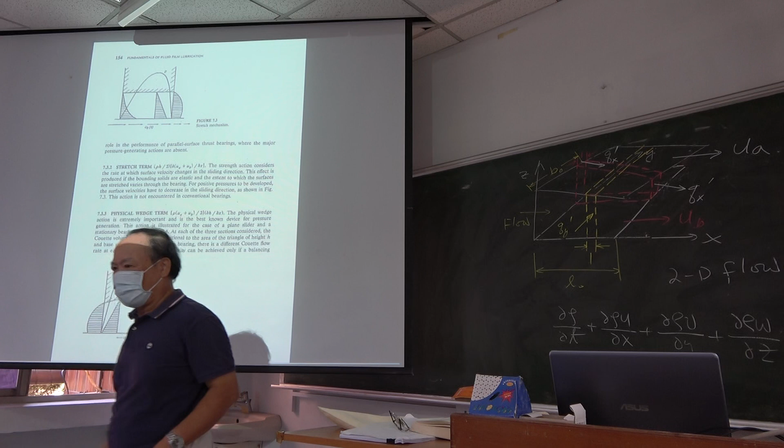This is the stretch term. For this term, UA and UB - if your profile looks like this one, you have your low surface. Originally it's UB, but it becomes the variable.

You find that your velocity from this side gradually becomes smaller. That's because originally you have a fixed value, but with elastic deformation, you allow your velocity - your flow velocity at the bottom surface or low surface - to be changeable, from high to low or low to high. If UB changes this way, and we assume the upper surface has zero velocity...

If the lower surface's velocity changes from high value to low value due to deformation, and if it's like this way, you can create a positive pressure. Your pressure profile looks like this one. Then your positive pressure is created if your UB changes from high value to low value.

So in this case, look at this term: UA equal to 0, UB changing with x - is it negative or positive? Is it a positive value or negative value? From large to small, is partial UB over partial x negative or positive? Give me the answer - positive or negative? This is large, this is small, so what about this? Partial UB, partial x - positive or negative value? If you cannot identify whether this value is positive or negative, I would say you don't understand the math - it's not a pass.

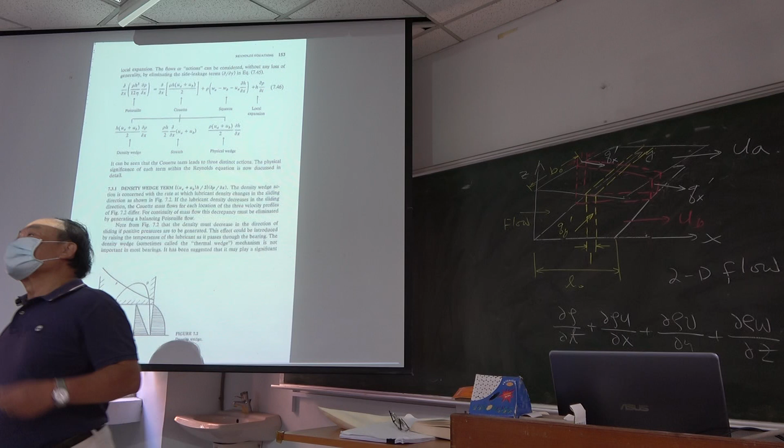Please keep in mind that you need some area that creates higher positive pressure. That is because you need lubrication - not just putting oil. Oil is not the key issue, not a key factor. The key factor is that in the flow field, you can create the positive pressure as large as possible.

This idea is very, very important because when you work outside, most people think that by putting oil, you can obtain high efficient lubrication. I would say no, because you don't create the high pressure, high positive pressure. So this term should be negative, and then this term should be negative, right?

This we call the stretch mechanism. This case occurs when you have a high pressure and allow some area to have elastic deformation. So here, this term we call the physical wedge term, which is just two surfaces - when they're not in parallel, there's an inclination angle, about 4 to 5 degrees at most. So there's a lot of people who make this wrong.

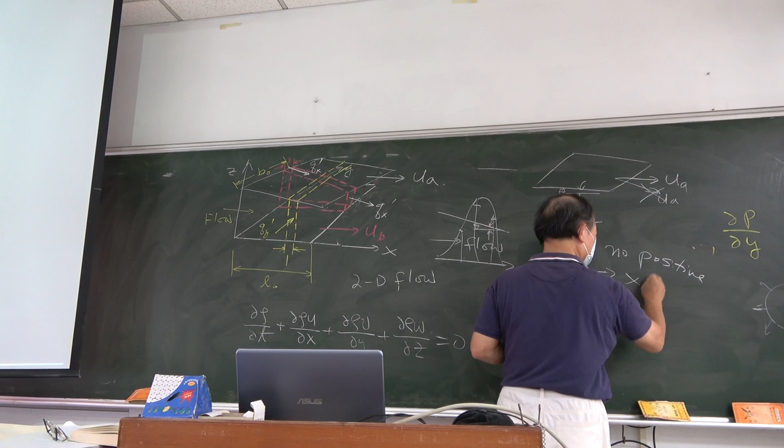You put the inclination of the flow in this direction. This is it. Then we create the pressure, positive pressure. If we put it this way...

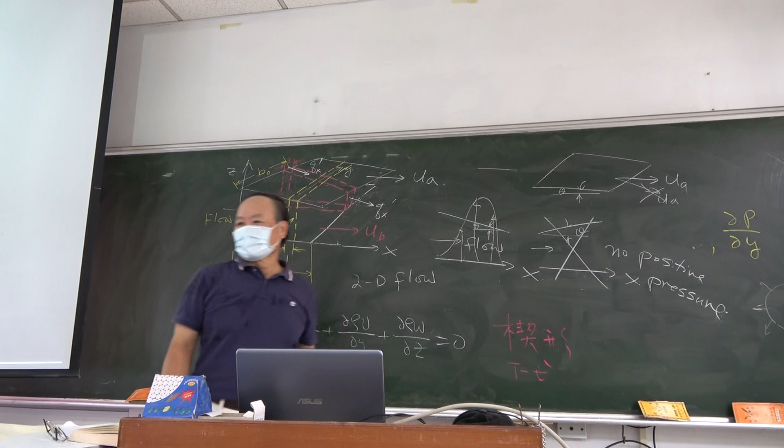Going from large to small creates a squeezing effect, right? There is a wedge. The wedge allows the flow to be squeezed, right? If squeezed, they have a high pressure created in the flow field. If it expands from small length to large length, then you don't have the high pressure created in the flow field, right?

So you have a design that looks like this one. This we call the wedge effect.

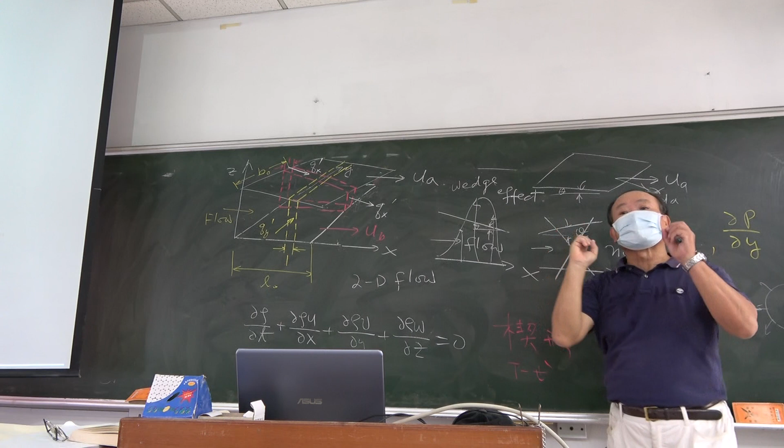How do we do it? Allow the lubrication to create high pressure. That's why we have water between the teeth - this water allows us to separate the two teeth, creating very small friction to avoid wear on your teeth.

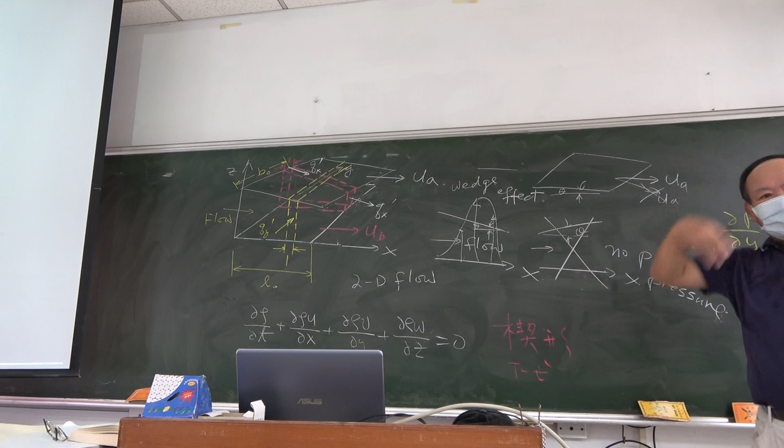That's why we have tears - because we have water between two moving surfaces, to protect your eye. We call this the lubricant. In machines, in every engine, there are many different kinds of lubrication we need to design.

So here, physical setup from here to here. We have two kinds like this one. Apply it again on the board. This UA equals 0, and UB is moving this way. Here we have an X defined in this direction, or Y in this direction.

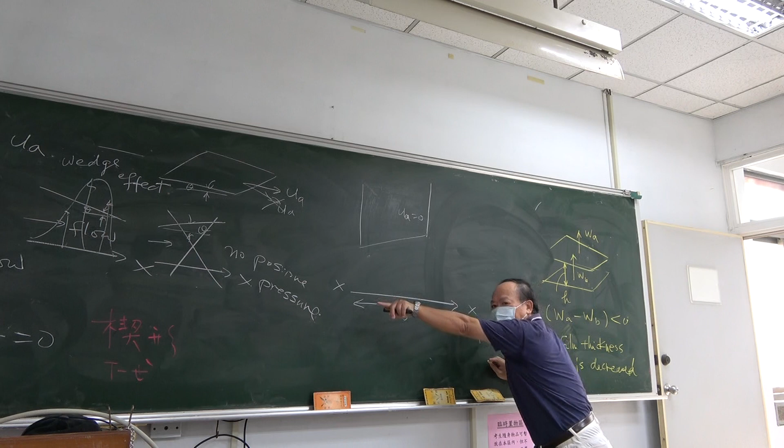In this direction, or in X direction. If we define in this direction, our UB plus UA, in X direction, this one - if you define your X as the right wall, then UB plus UA, with UA equal to 0, this value is on this side, so it is negative. And how about this one?

If you define this way, and your configuration is like this way, then H changes with X direction if defined in this way. What is the value? Larger than 0 or smaller than 0?

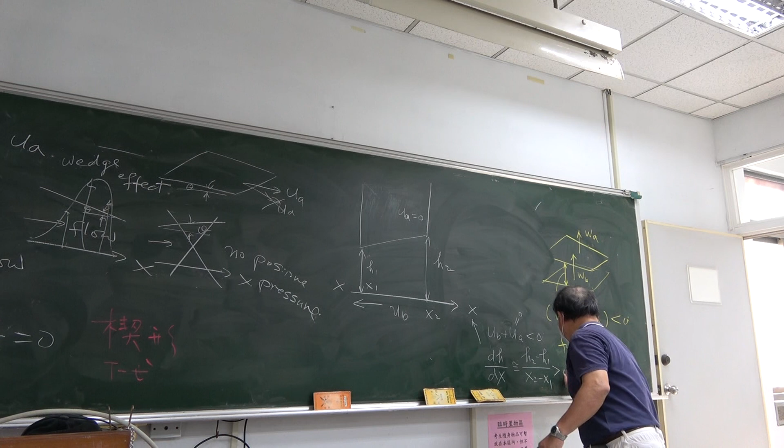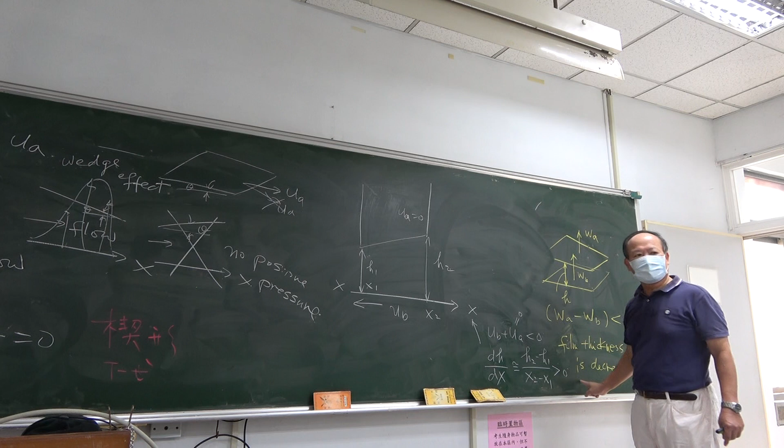UA plus UB smaller than 0, and DH/DX is larger than 0. It looks like this case. You define your X in this way, on the right wall. So please tell me, UA UB times partial H, partial X.

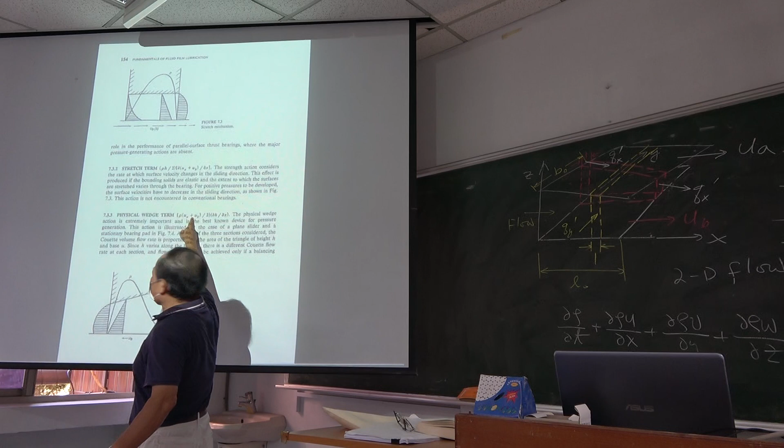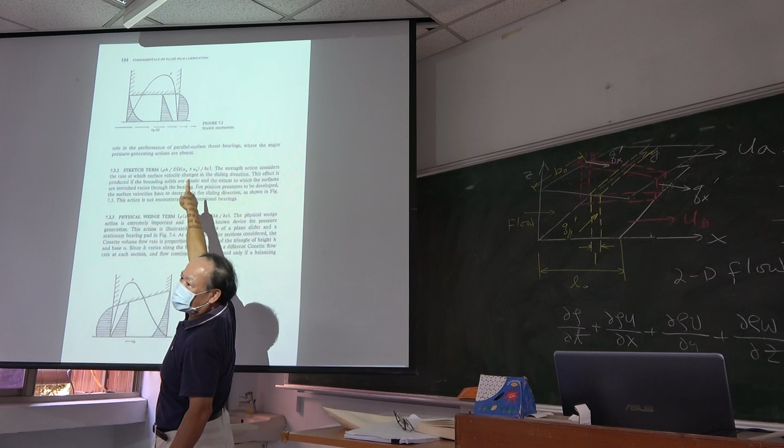So velocity - this term, UA plus UB, is a negative value, and partial h partial x is positive. So negative times positive, this term is a negative value. If it is negative, like the last one, we can create a positive pressure.

Now, if you change your x to be in this direction, to the left side instead of the right side, you allow x to be the positive direction this way. In here, UA plus UB is positive because your x is defined in this direction - UA, UB is in the same direction as this x.

But here, from here to here, partial h partial x should be negative, right? From here to here goes from large to small. So partial h partial x is less than 0.

So this term together should be negative, the same as this one. So whether you define your x in this direction or in this direction, you have allowed this term to be negative. In this case, you can create your positive pressure like this one.

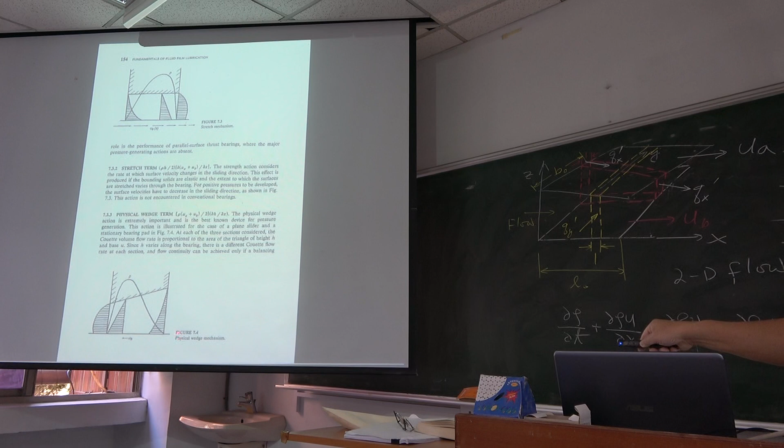Which one? Is this case or this case? In this one, x is this one. So please mark x here, not this here. It's marked here, alright? And then you have this term value to be negative.

In this case, you can create a positive pressure. I repeat again. Try to have your sum area, lubrication area, to have a positive pressure, and then this value should be as large as possible.

That's the only way you have a high efficiency design - good lubrication. Okay, not just put the oil. Put the oil is not the key issue. You try to keep your fluid with the positive pressure, this positive pressure as high as possible.

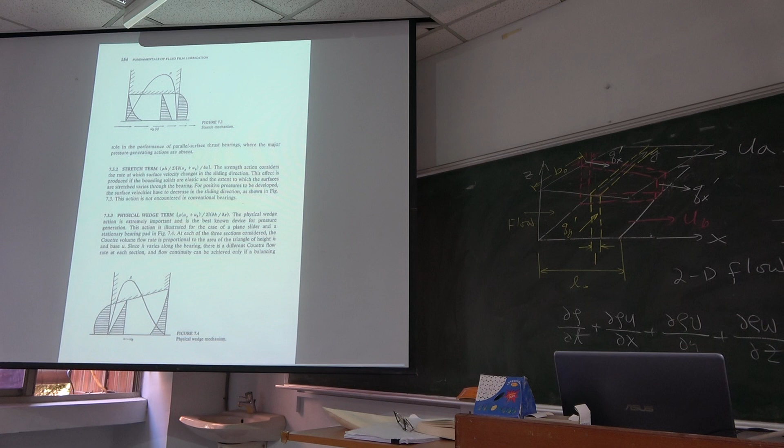So this X should be here, so it's associated with this case. This we call the wedge. You find that the flow goes from the right hand side to the left hand side, right? You find that the space becomes smaller and smaller.

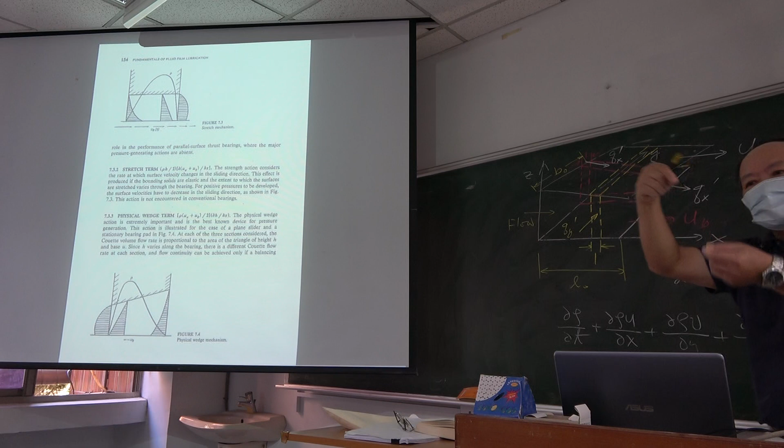This quantity becomes smaller and smaller. This space changes to be the negative value. The film thickness becomes smaller and smaller. The space becomes smaller and smaller. In this case, we call it the wedge effect.

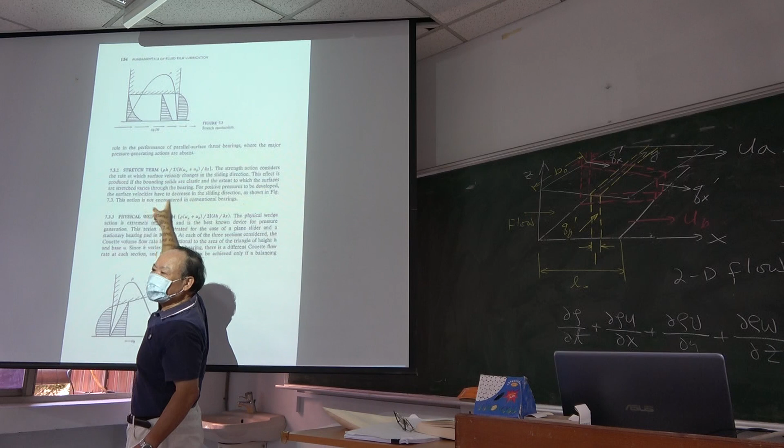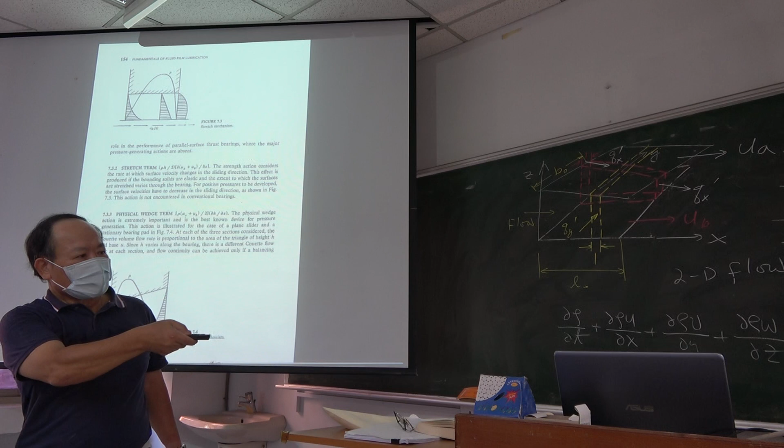It's very important that you try to have your mold and then your workpiece or your bearing to have wedge effect. If you have wedge effect, then you can create the positive pressure. You need to let this wedge pressure satisfy this case, not satisfy this other case. This term should be negative.

If two surfaces have the lubricant between them, right, if the thickness is increased, if you increase your thickness, you'll find that the space becomes large. Can you create the film thickness? No way. Okay, please return to the Reynolds equation.

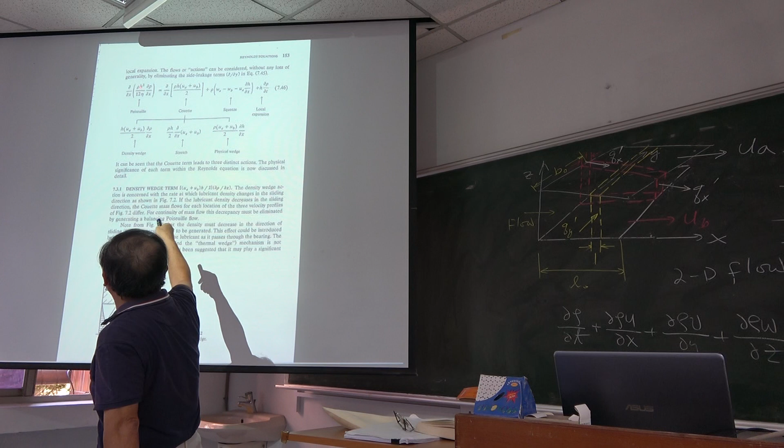In the Reynolds equation, if P is large, how is H? If you keep this term to be a finite value, you increase your P. How to increase your P? You have to reduce your H. Reduce your H to create a large pressure. If you increase your film thickness, then your pressure will be low.

Keep write down, okay? Write down - very important. Not just give the large space and allow the lubricant to enter. No way, it's impossible to create the positive pressure that way. The lubrication allows your film thickness - increase your thickness, pressure becomes low.

Your film thickness is low, then your pressure becomes high. Okay, so they are opposite. They combine together - should be the moderate value.

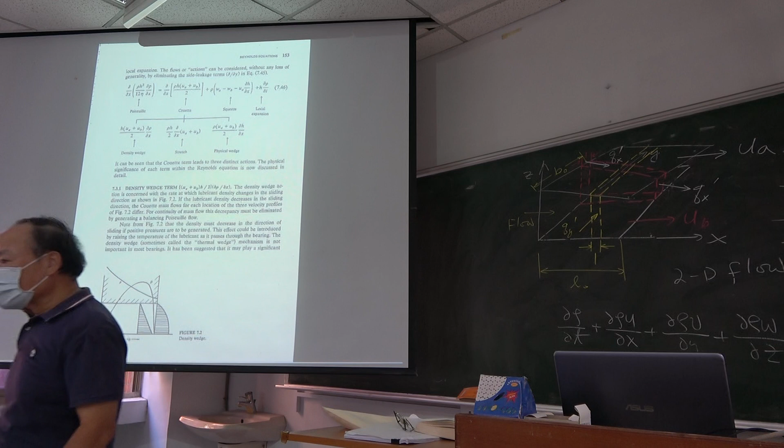Because if the film thickness is too large, then your pressure is low down to be the zero pressure. That's very, very important, understand? So lubrication is not an easy thing.

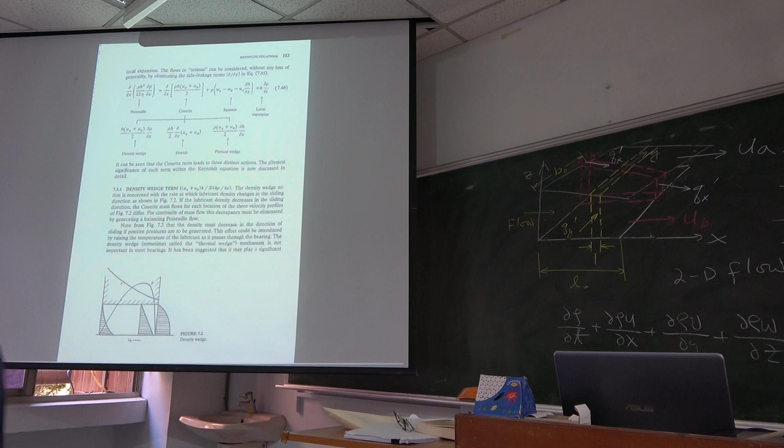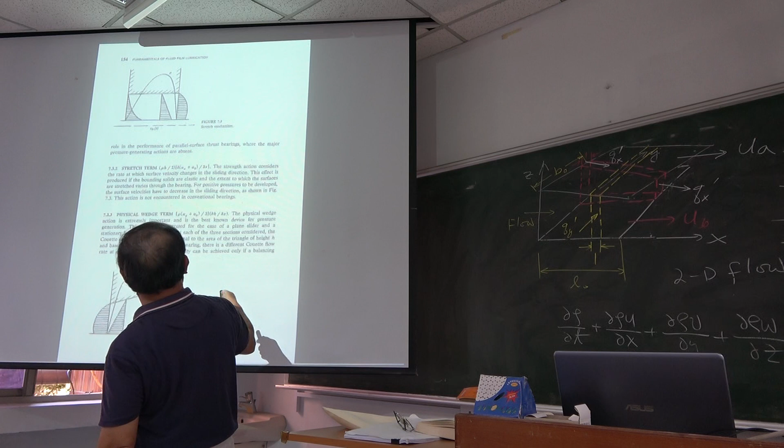Okay, so this is the physical sense we've discussed. Okay, next. Here, normal squeeze - so how do we allow the squeeze term to create the positive pressure?

Allow the upper plate to move with velocity, we call it WA, in the normal direction, upward, right? The lower plate also moves upward. We assume maybe they are separate, maybe this is not always upward, maybe downward. But finally this WA minus WB, this value should not be equal - right, WA minus WB should be less than 0.

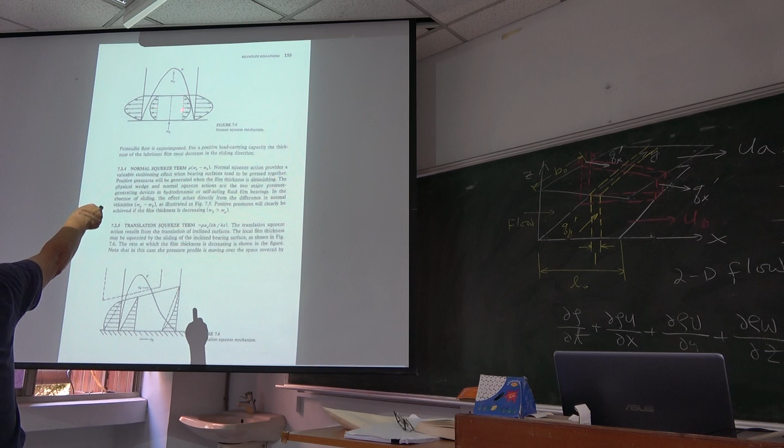They move close to each other, allowing the film thickness to decrease - you have to allow it to decrease. If it decreases, then the flow originally inside the film has to be squeezed out to the two sides.

So the velocity will look like this one. On the right hand side, the velocity looks like this profile. On the left hand side it will be this way. Because these two surfaces are close to each other, we call this the squeeze effect.

So this term will be negative all the time? Yeah. But I don't see what... it's just that WA is just this speed, upward speed. But it's just this part.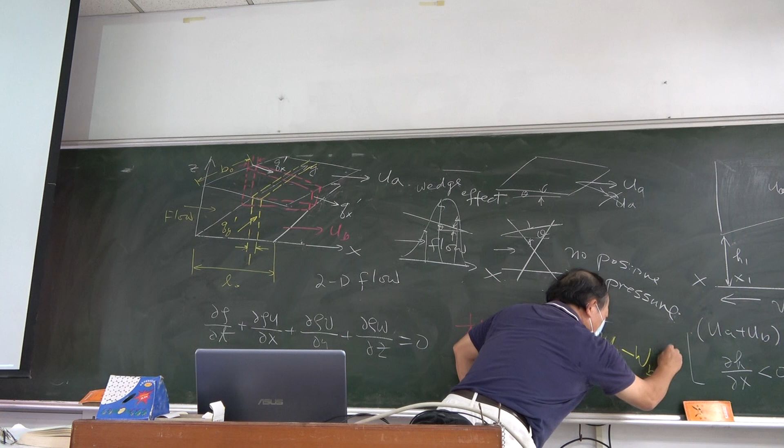Well, I showed you the upper wall - we don't care whether it is upper wall or a lower wall. But if WA minus WB is a negative value less than 0, you mean the thickness is decreased, alright? I don't care whether it is upward or downward, alright - if these two values minus each other create a negative value, you mean the film thickness is decreased. Film thickness decrease - if it decreases, we call it the squeeze effect.

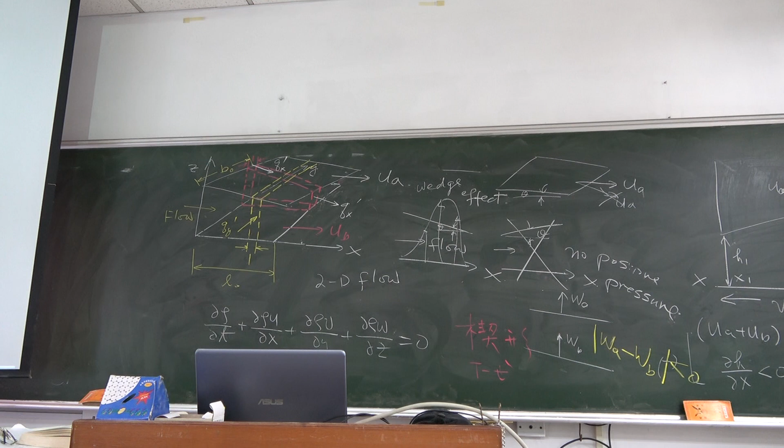Okay, like this one. And then we can create a positive pressure, so this term is also a negative value.

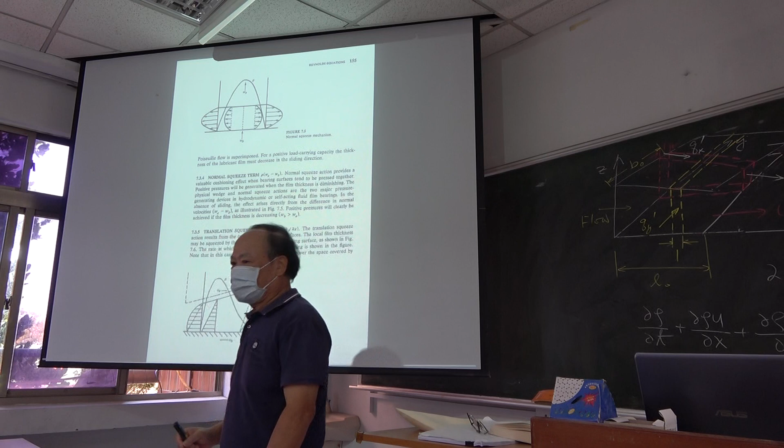Please find out - this value should be a negative value. If we need to create the positive pressure, this value needs to be negative. Okay, the last term we call the translation squeeze.

Okay, let me talk about the solid case. The solid case looks like this one - this is the dash curve.

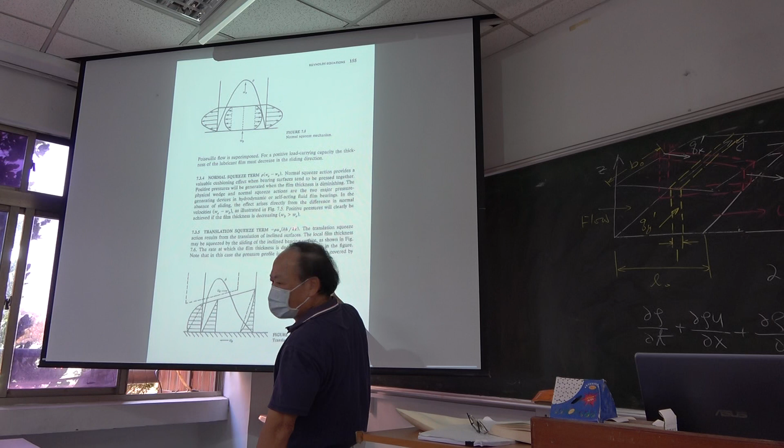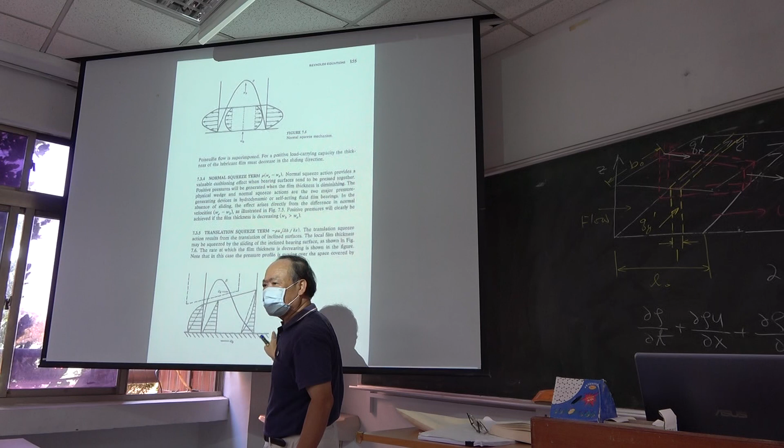So in this case, now partial h, partial x is here.

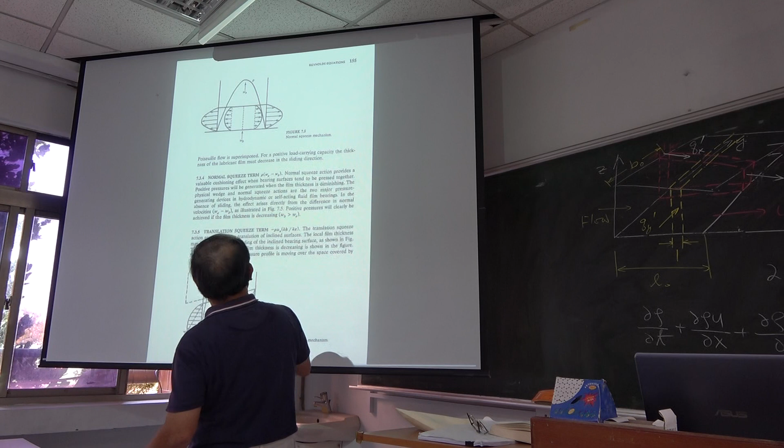Here, dash 1 is this case. First, this case. If this case is like this one, here, from large to small, right?

If you look like this one, we call the physical wedge mechanism. And then just this solid curve, like this one.

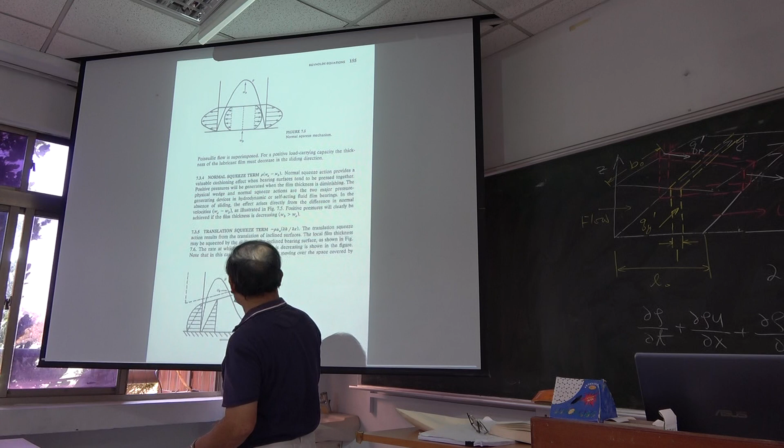So solid curve, we have the profiles, look at this one. We have the solid velocity profile, like this one. So the solid profiles, just like this one.

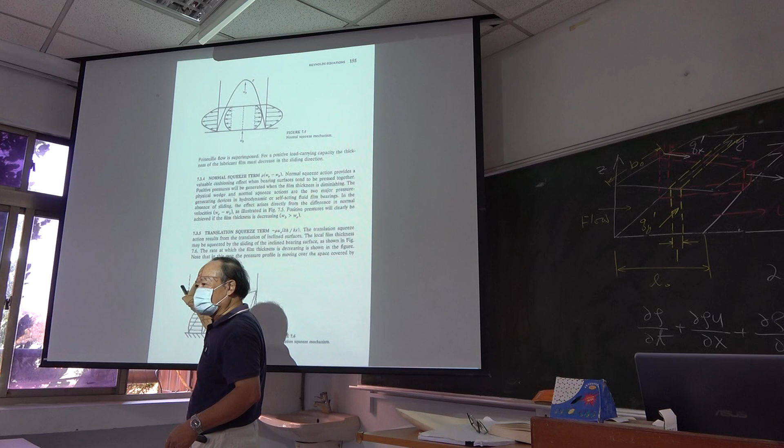And then we compare with this one. This case origin is in this position. Now it's moving to here. Let me plot it on the board.

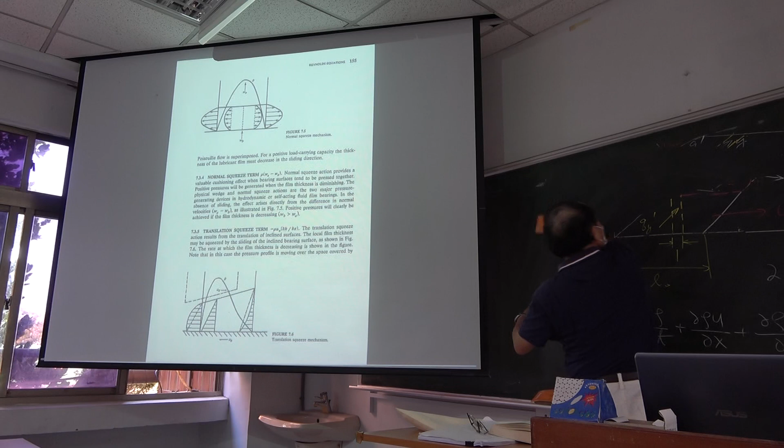You design your model, or design your workpiece in contact with your model. That's very important because the configuration or shape of your model is totally dependent on whether your design is good or not. Please believe me. Your model is designed by you. You can choose the optimal design or the worst design.

I don't catch what is or why is it not... this x direction is x1 minus x2. Yes, if in this direction, yes it will be. This is x1 minus x2. This is x2.

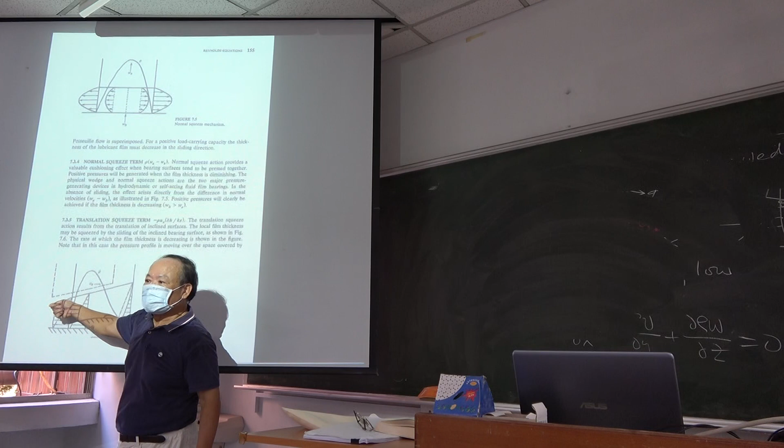Understand? So for this one, this case, it will be this one. Because we look at the velocity profile, it is in this direction. So flow is from this direction, from the right hand side to the left hand side, because your flow profile, you look at that one.

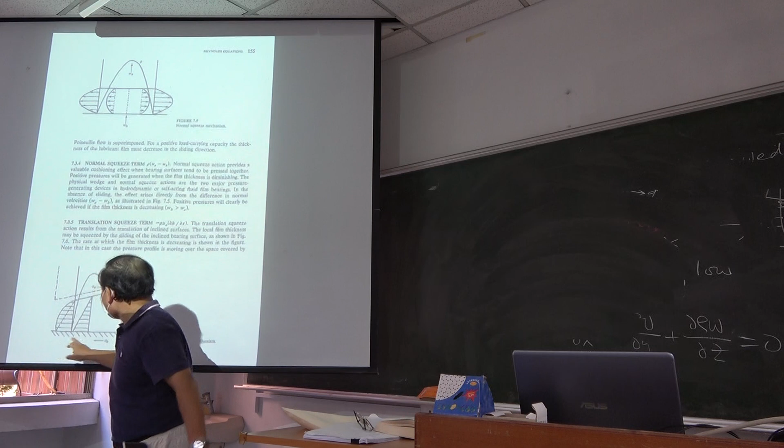So your x is just in this direction, because your UB is also in this direction. So your x should be in this direction. This is our case. Now, this is just a physical wedge case.

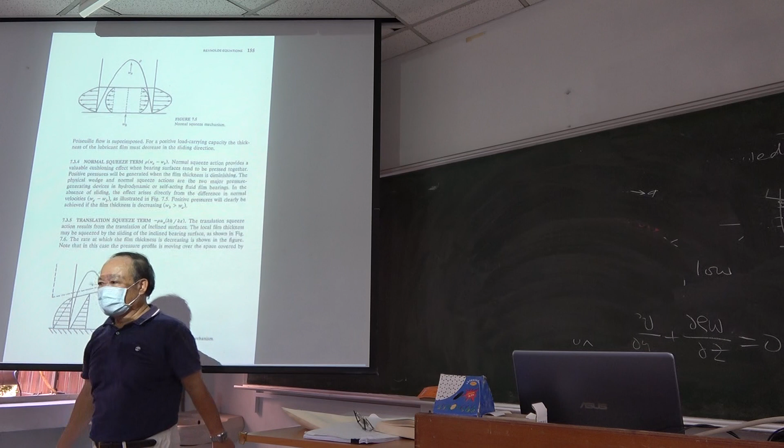And then here we talk about what we call the translation squeeze terms. Squeeze terms: we have two terms. One is the normal squeeze, and then tangential squeeze. What is the tangential squeeze? That means...

Here, originally this upper plate is at another position, with the inclination angle, a small inclination angle theta.

Now we move here, from here, we call it UA. So this point, for a unit time, originally at this position, it moves to this point. So it is UA times 1, because our time is set to be unit 1.

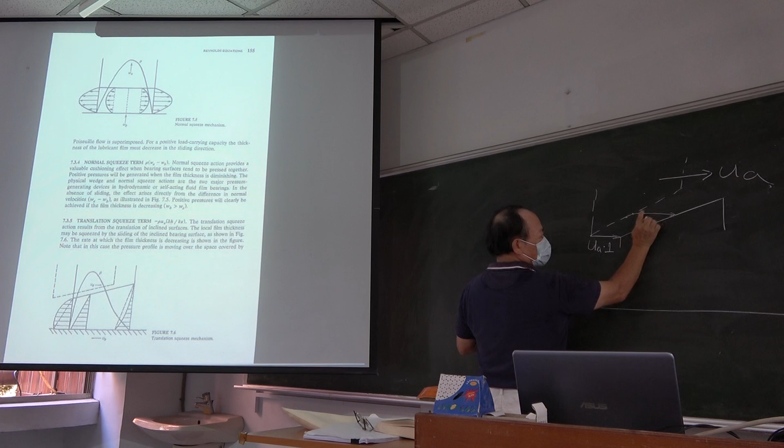So you move a distance from here to here, then any point from here moves to here. This length is equal to this length, right? So in unit time it moves parallel over, and this point goes to that point. Now let's look at this coordinate, at this fixed position. We set this position to be the fixed one.

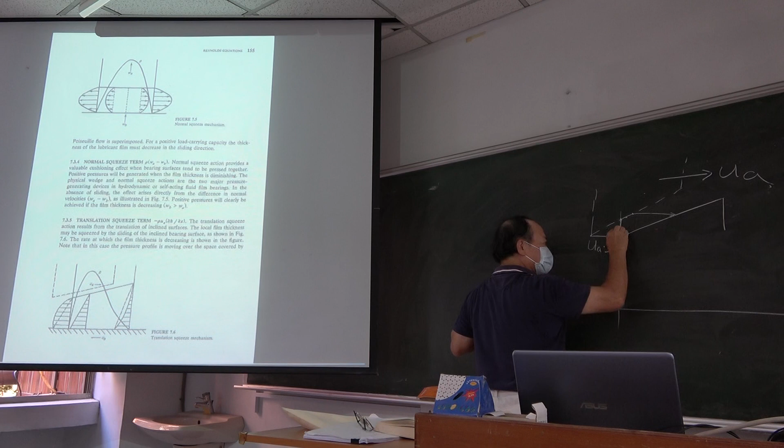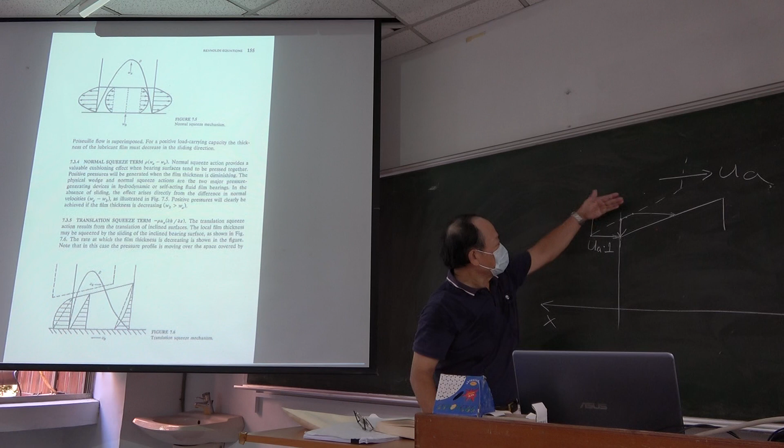Originally at this position, at this point, it is this point. But if this point moves to here, our film thickness is decreased, from here to here, is that correct? This point moves to here, and this plane moves to this plane.

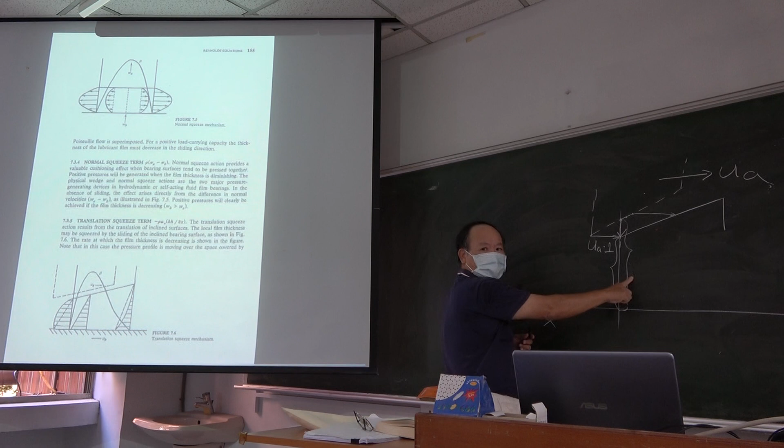When this plane moves to this position, we look at this point moving to that point. And your original film thickness out here, look at this one, this is the original film thickness. But when this surface moves to this position, you find that your film thickness becomes this one. So this is the original, this is the later one. So does this thickness decrease or increase? Your film thickness decreases or increases when this plane moves to here.

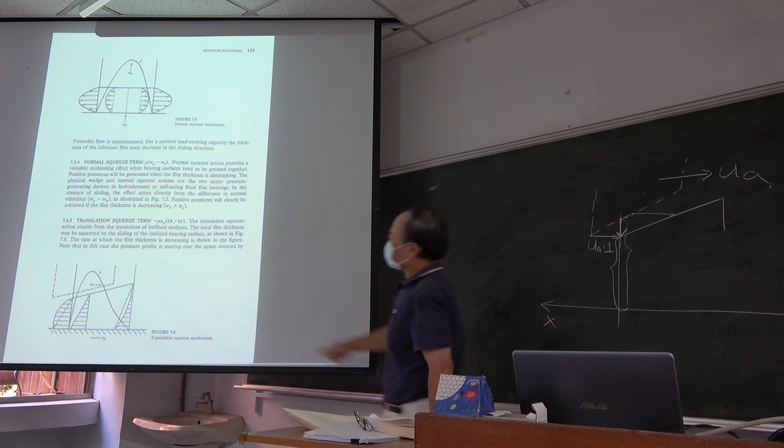Your film thickness becomes small, so we call this the squeeze. This we call the tangential velocity, allowing your film thickness to decrease. Is that clear? Okay, let me write it down.

This we call the tangential translation squeeze term. So squeeze has two effects, two factors.

One is the two surfaces closing toward each other. Another is we have an inclination angle, a surface movement translation. Translation at a distance allows the original thickness to decrease. In this case, we can create a positive pressure.

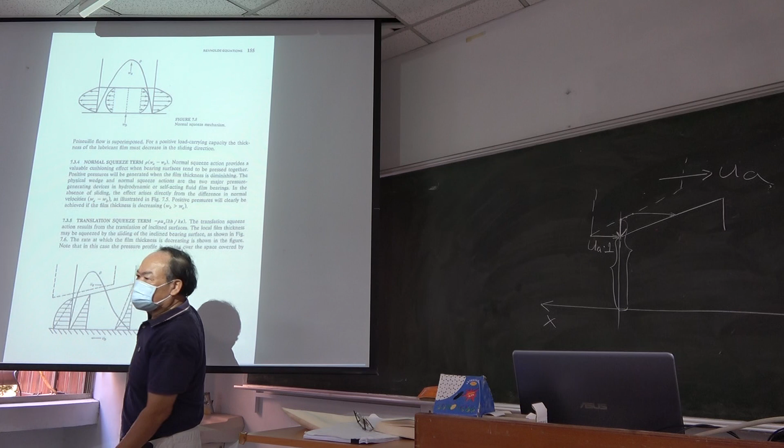This also creates positive pressure. So these two squeeze terms combined together, we call the squeeze. We add the two together, that is the squeeze effect. Alright? Understand?

So after class, please review it carefully, because in the future you want to design a lot of molds. How the mold is designed allows you to create the positive pressure in your lubrication. That's a key issue, a very important issue.

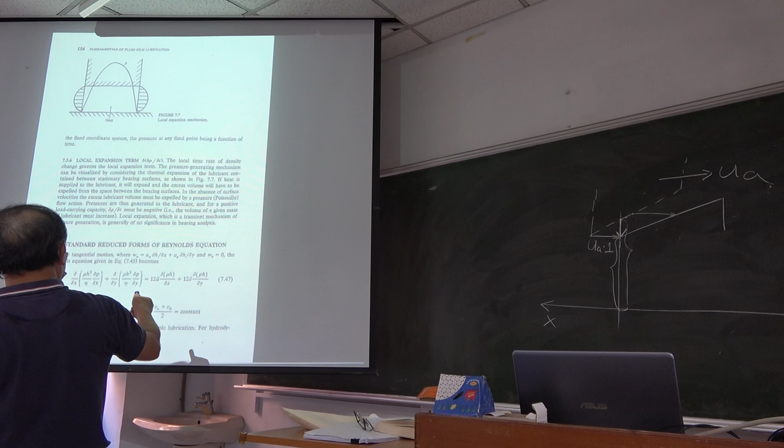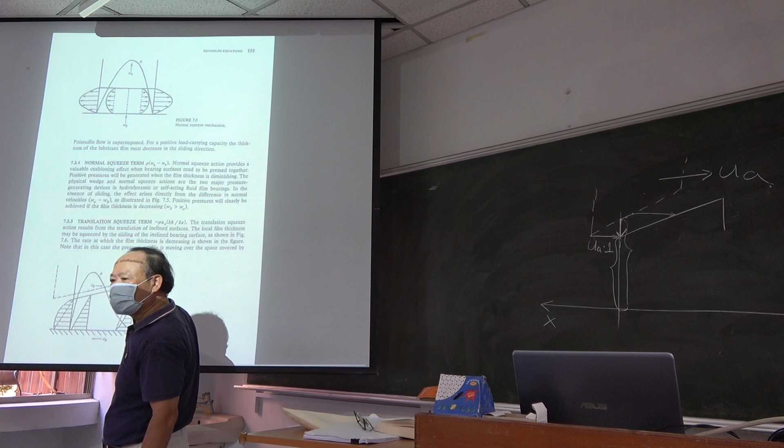So your UA is positive. Partial H partial X from small to large, so partial H partial X in this X direction is also positive. But the positive value times positive pressure gradient, they have the negative sign in front of these two values. So this value should be negative in order to create the positive pressure.

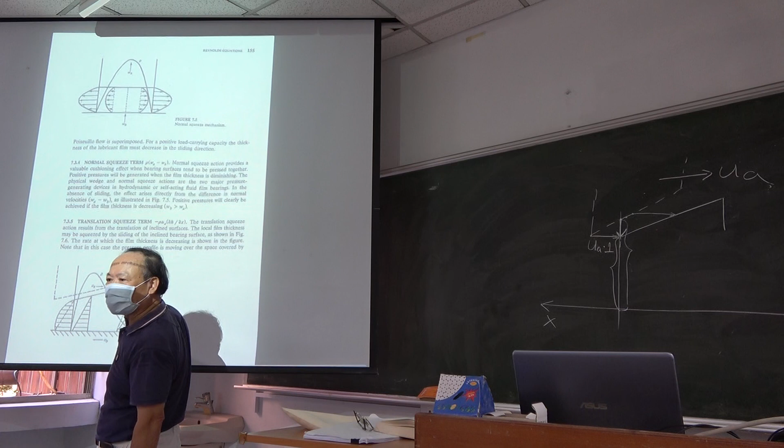This direction, X. UA is in the same direction as the X direction, right? Partial H partial X from small to large, so partial H partial X is also positive pressure, right? Because you increase.

If we are mathematical, okay. You are the graduate student, you have to understand every differentiation, what is the physical sense. If not, you are not so qualified.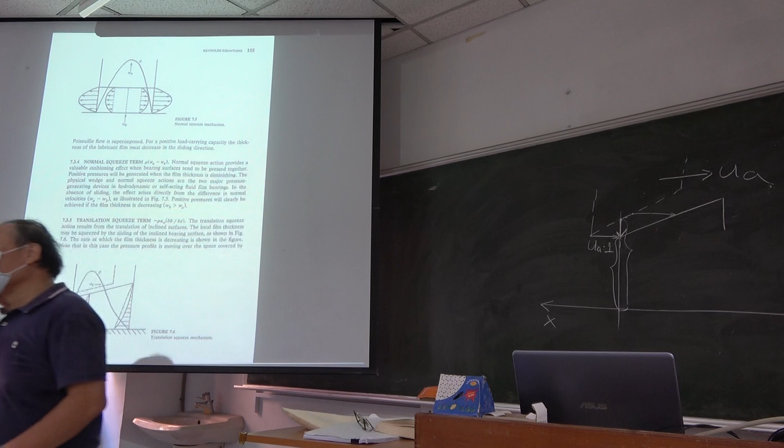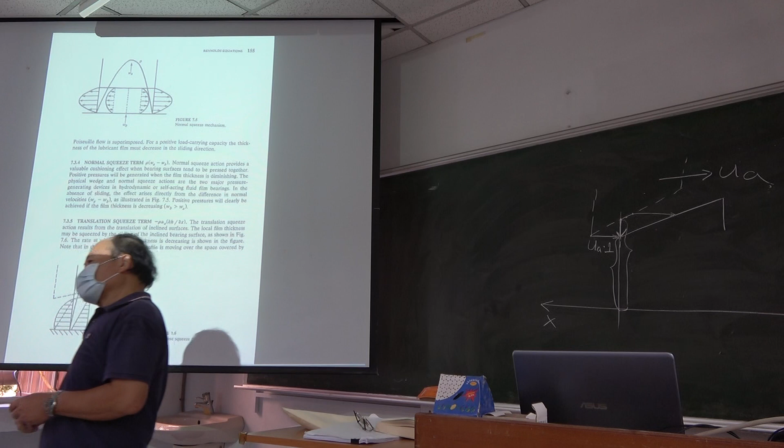So if in the future your business becomes a billion people business, you have to thank me, okay? You have to record that your design allows you to get a lot of money, much money. Okay, that's very important.

And then the last one, we call the local expansion term, is density changing with time. Why will density change with time? In general, it's related to the thermal behavior. They have heat from the outside transported into the fluid field.

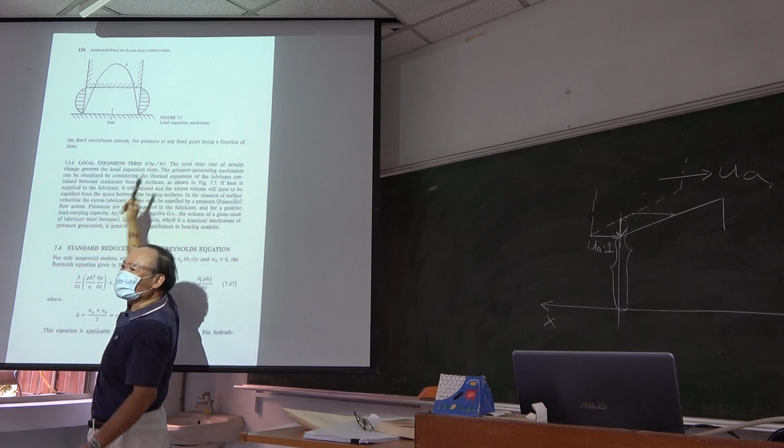Negative. So if I put heat from the outside into the fluid field, in this case partial rho partial t is a negative value, H is a positive value. So in this case this value is negative, and this value being negative allows you to create the positive pressure.

Understand? So all the terms in the Reynolds equation, except the Poiseuille flow, all the terms should be negative value to allow you to create a positive pressure. So rigidity, okay.

So this we call the local expansion. What is expansion? Because your density decreasing allows your volume to expand from the original volume. Your density decreases, then your volume will expand, increase, because heat was carelessly transferred into it. This time, partial rho partial t is a negative value.

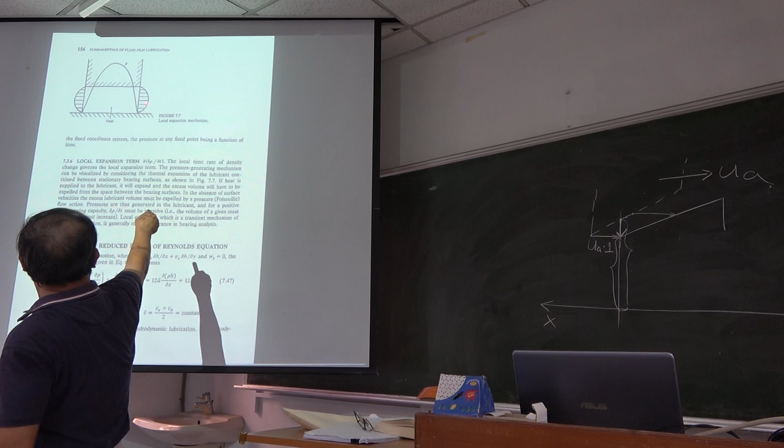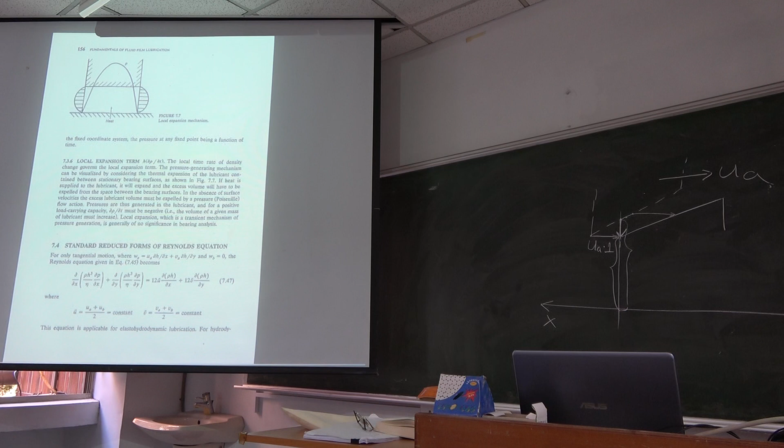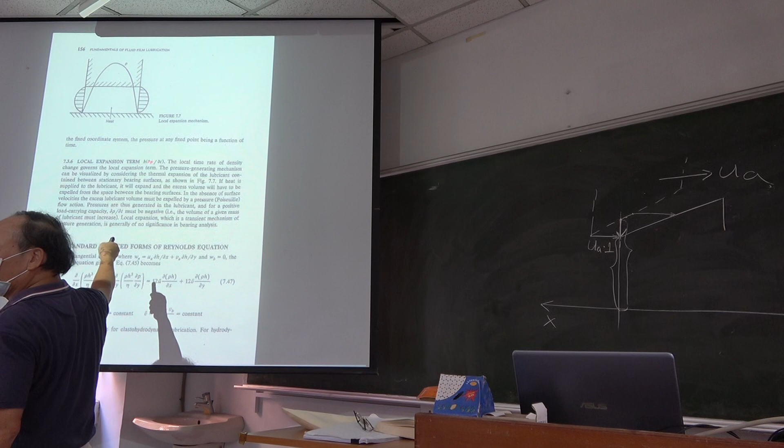This is also negative value allowing you to create this, which looks like the squeeze term, right? Here we don't change the film thickness, last time we changed the film thickness. Here we don't change it, the film thickness is fixed. We just change the density. This is different from changing the thickness. Earlier, two surfaces close to each other meant the thickness changes, so the previous squeeze effect was through thickness change. But here we cannot call it squeeze because we change the density, not the film thickness. This we call the expansion term.

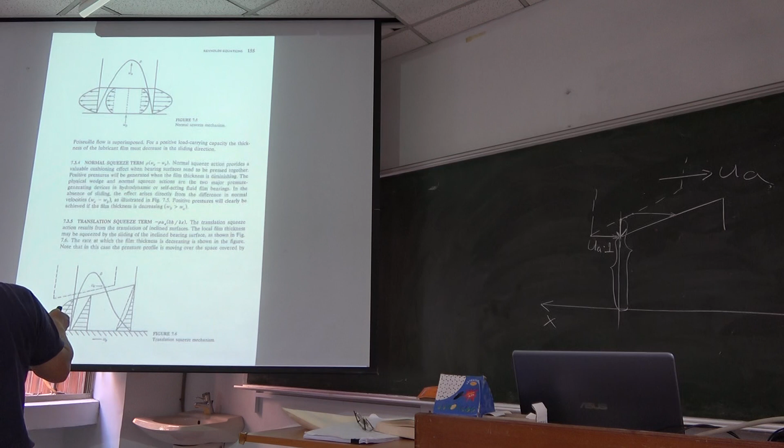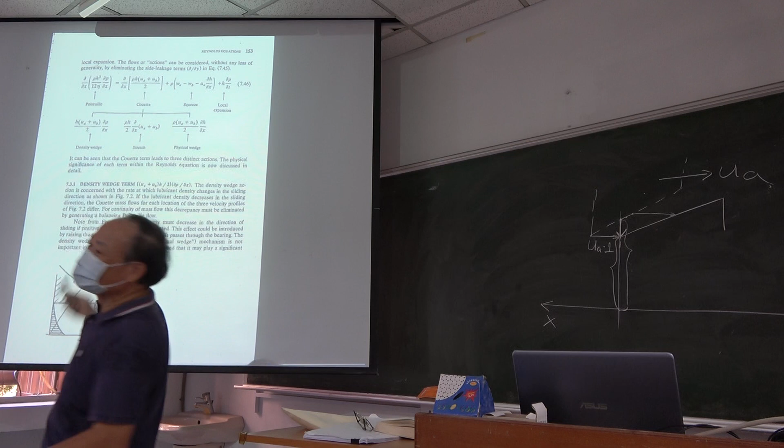Okay, alright. So all the terms in the system should be negative in order to have the positive pressure created in the flow field. You need to produce positive pressure, so all these values must be negative.

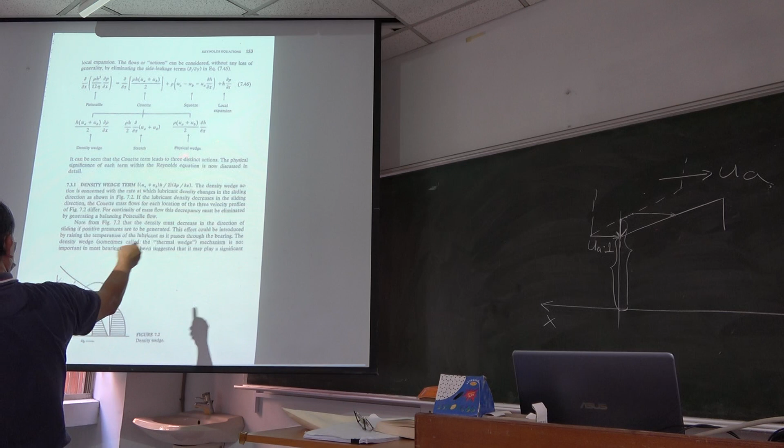So from this, now we turn this complicated form into a compact form, to be grouped, to be related, to be compact. I want to write these complex mathematical expressions into a simpler equation. So let's take a break, then write this quantity into a simpler equation. All this term is very useful for your idea to have an optimal design in your work. Read it many times.

And then they have the chapter, they have the table, allowing different designs to give you different efficiency, right? Like rotating counterclockwise or clockwise, do you want it to turn the positive direction or reverse direction? Then should it go forward or backward? So the mechanism design is very important.